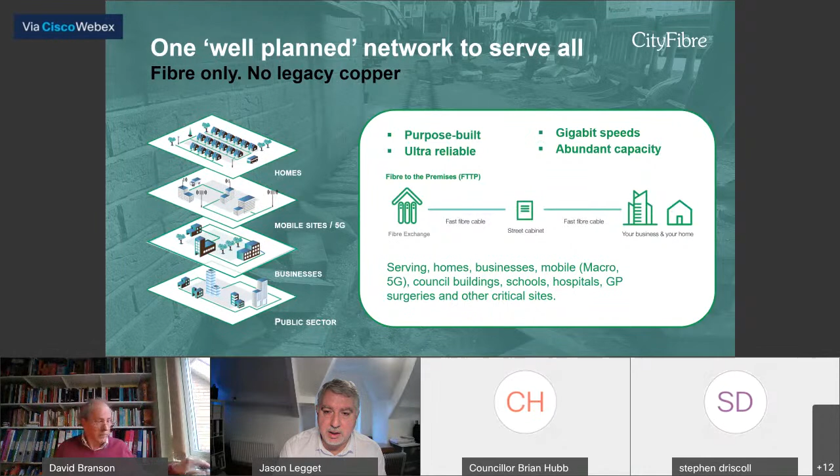For Middlesbrough, it totals around £40 million. We are making some design changes currently as we take a real close look at what we can physically do in Middlesbrough. Again, the point I made earlier is it's always going up - we are looking where we can to maximise our reach in every town and city.

So as we get into that understanding of what we can build, we're obviously trying to increase that investment. Currently I think we've gone from about 70 to 80,000 homes as a target, and we're looking to get higher towards 90,000 homes. That's expanding outside of the boundaries of Middlesbrough and into East Cleveland, into Grangetown, into South Bank and places like that. So this investment is a significant one for the town.

And what we've done is we've worked with an organisation called Regeneris to look at this long-term investment value to the town - what does it actually fundamentally mean? The data they provided back to us showed us ultimately, of course, we're going to make a direct investment with resources, with people, with creating jobs, etc., investing around £27 million in the cost of building that network. But also the longer term is what do you get back as a city or town having had that investment in the infrastructure?

They've looked at this from a whole range of different lenses, as you can see there, and they're presenting a really strong and positive message as to the value of this fibre. I think, as what we've been through over the last year and what we're still experiencing, we're all seeing the real value of connectivity now in our lives, and I think it's only going to continue to go in this direction.

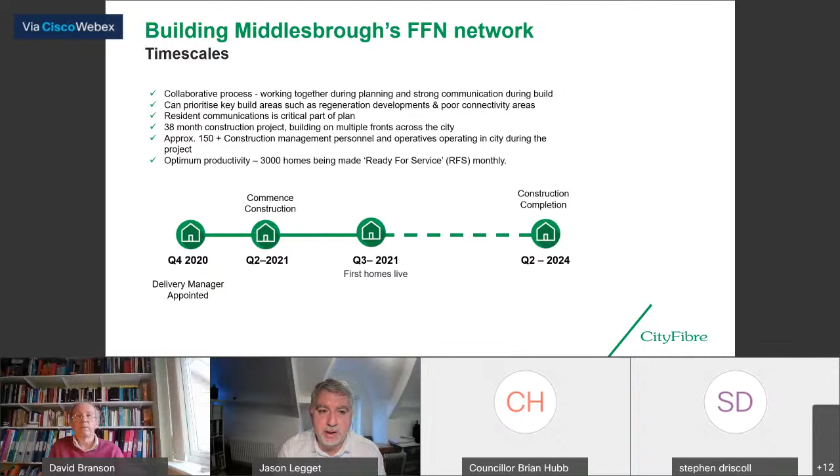Now, when we build in a city, we work in partnership. Our investment is a full private sector investment. We're not looking for public sector support by way of funding or any kind of contribution. We see this as an investment that stands up on its own, and therefore we're quite happy to work in parallel with local partners like the council.

The way that we like to do it is be as collaborative and open and transparent as we possibly can. So we look to set up governance structures that meet the needs of the local authority, but also our own build. We have a number of options.

We can look at monthly, weekly, and quarterly governance sessions. They can be about reporting against metrics, talking about the way we're working with local authority teams. We can feed back on a regular basis on how the relationship's working both ways, so we can address any challenges or problems.

We can support where we can to help. When we come into a town and start building a network from scratch, we accept that the amount of work we're doing can have implications for the town. So where there are issues, we can support the local authority, whether through additional support, people, or resources, or just looking to be cooperative in a partnership approach. We have a great deal of transparency in our work, so we're quite happy to share our progress, looking at maps, details, and where we're going.

As Jason said, my role is the area build manager with responsibility for all of the cities in the North East region, which would come under Jason or Steph's remit. I've been doing this for 33 years now, so hopefully by now we should be able to get this job done as quickly and as low impact as possible.

Just to talk you through the stages of planning a well-planned city build: first we do what's known as a high-level design. This effectively looks at the whole geography of the city or town, then subdivides it into areas called primary node locations, which are on average around 480 homes or premises, as they may include businesses. It can go slightly higher where we've got large tower blocks, MDUs, etc.

Once we've got the high level design, we issue it to our design partner, who will go out and physically walk every single street of the city, surveying it for suitability. They'll look to optimize the design - we're now very much leveraging what's known as PIA, or physical infrastructure access, utilising a lot of the existing Openreach network, be that underground duct or overhead pole, to allow us to run our cables without the need for major excavation works in a location.

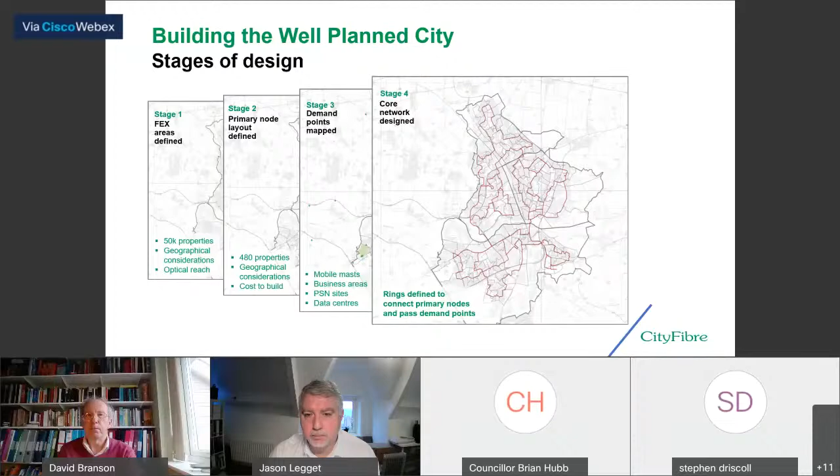Once we have the designs back for the primary node locations, we look at the sequencing of the build across the city. Rather than a scattergun approach, it's a case of evolution - we build out from where our fibre exchanges are located, in a contiguous manner, always connectable back to the fibre exchange and therefore lightable. So as soon as possible after people have seen us building past them and seeing the progress we're making, we're then able to offer services across our various ISPs to the local communities.

With regards to FTTP deployments, the provisional desktop planning is now complete. Low-level design is now underway, going well, and at quite an advanced stage, with 2 to 3 surveyors from our design partner currently in Middlesbrough, 5 days a week, working through those. We're now a 2 fibre exchange city - Sotherby Road, the Skippers Lane Industrial Estate, and Lytton Street, which is a small industrial estate closer to the town centre.

That's going to allow us to build the city more effectively, because we have a natural boundary line of the railway line that comes in from Nunthorpe all the way into the town centre. So by having a fibre exchange on either side, it dramatically reduces any special engineering difficulties and unnecessary cost when we can put 2 fibre exchanges, and that allows us to serve everybody in Middlesbrough.

We've now been able to extend that area out somewhat to gather up more homes. The connectivity is actually going to be comfortably in excess of 90,000 properties - about 92,500 at current numbers, based on the current premise count and boundaries. Although as we move forward with a lot of cities, we can increase our scope and extend our boundaries to gather up any new developments, any new blocks of apartments or flats that happen as a city evolves over the life cycle of the build.

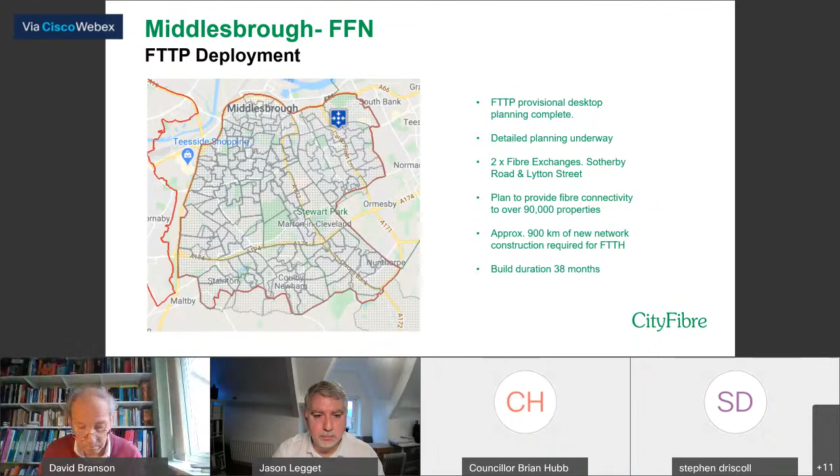There's going to be about 900 kilometres of fibre cable deployed into the city. What you're looking at now is a high-level design - if you're looking at the boundary lines, the various random non-uniform lines, they're actually boundaries of primary node areas, and within each one there would be, on average, about 480 premises or homes, depending on the type of locality we're in.

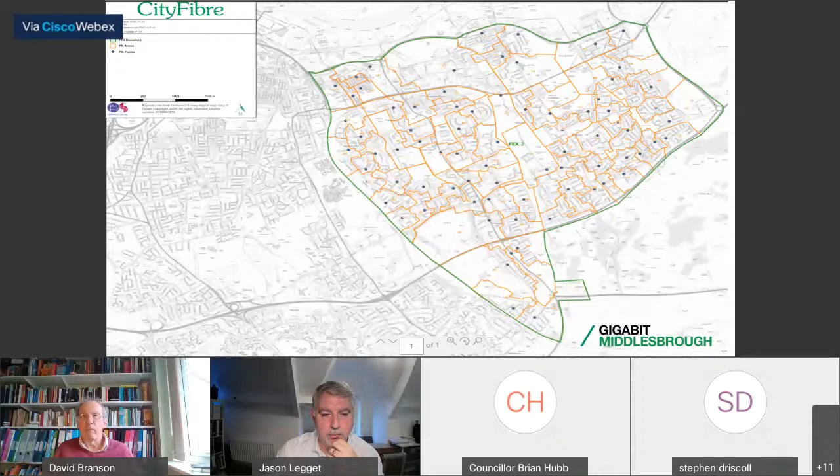If we'd had a single FEX design, it would have presented quite a significant number of engineering challenges, simply to navigate not only the railway, but there's also a beck that runs alongside it at certain locations. So early on in the process, I reviewed the city and went back to our business with a proposal to move to the 2FEX model, which gives a better level of service and coverage for the residents of Middlesbrough, but also presents a far more acceptable level of engineering challenge.

This is a very, very simplified drawing, but what it shows is that once we leave our fibre exchange and get to a primary node, that's always underground feeding the primary nodes, because that's what's known as our core network. They are much larger fibre cables. Once we get to the primary node, then there are a number of options that we have.

We can feed our FTTP using DPA, which is duct pole access, or PIA, which is physical infrastructure access - they're absolutely the same thing. DPA simply lends itself more to where we're using Openreach's existing network all the way up to the house on underground fed estates, so we can get to the front wall of the premises ready for install. On the one where we go overhead, which is PIA, that's a simple overhead install in exactly the same way anybody would normally get a telephone line installed. We get out to the poles, then we can span along, and get to the customer premises overhead.

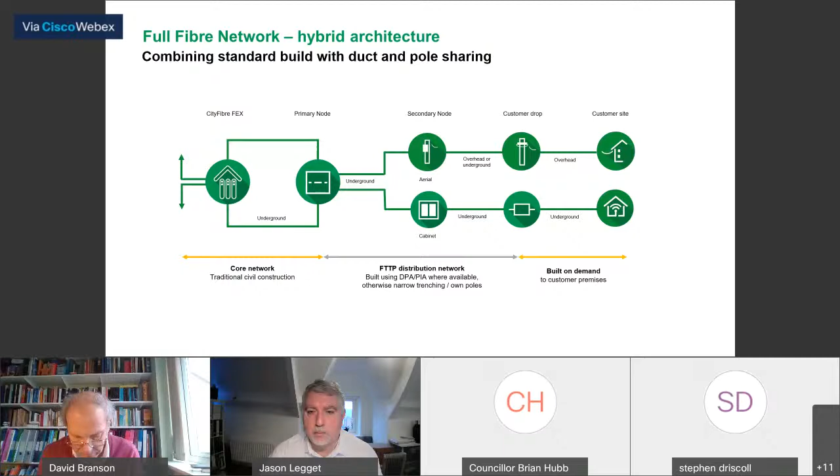We get from a primary node to what's known as a secondary node, which is a smaller cabinet that takes 48 premises as a maximum. From there, we have individual 7mm buried tubes going to the curtilage of the front of the premises. Once people request an installation, we can blow a very small fibre through it and provide connectivity within about an hour or two of arriving on site. An installation will be completed by an engineer.

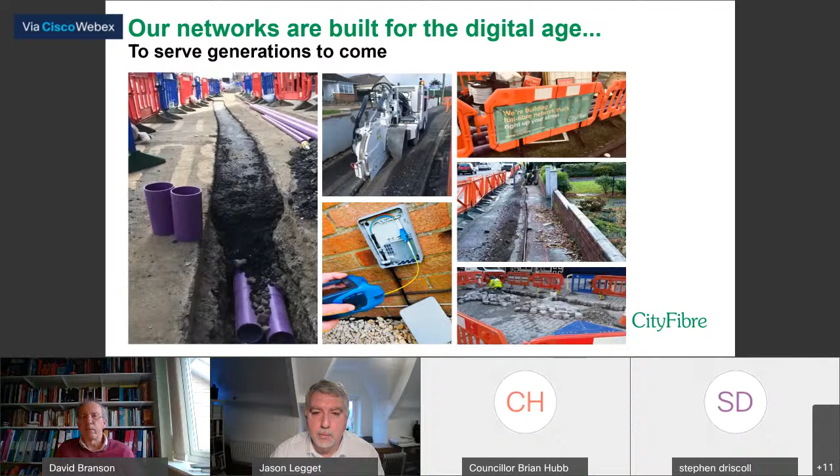The construction process is quite straightforward and not overly complex in terms of the civils aspect. Site setups will be in accordance and compliance with the Red Book and the Code of Practice. We regularly have both our own build assurance engineers employed by City Fibre and supervisors going around performing regular, frequent and robust checks to ensure compliance.

The laying of the ducts is done either through narrow trench or a more standard 300mm trench, using the open cut method—so we are actually opening ground rather than using thrust boring or other techniques. That said, there are occasions where directional drilling might be necessary due to challenges above ground, like very busy roads or newly reinstated ones. In certain circumstances we can utilise directional drilling.

Reinstatement of the pavements is always in accordance with HAUC and the SROH, so standards are checked, subject to robust, frequent and widespread auditing across the whole area. We task our contractor with auditing a minimum of 50% of their gangs deployed on a weekly basis. Although our target for our build assurance engineers is slightly lower, we generally exceed it by some way, to ensure we get a representative, value-add sample giving a clear picture of the standard of work, and ensuring we leave pavements, roads and grass verges in the condition we found them—one key factor in minimising impact on residents.

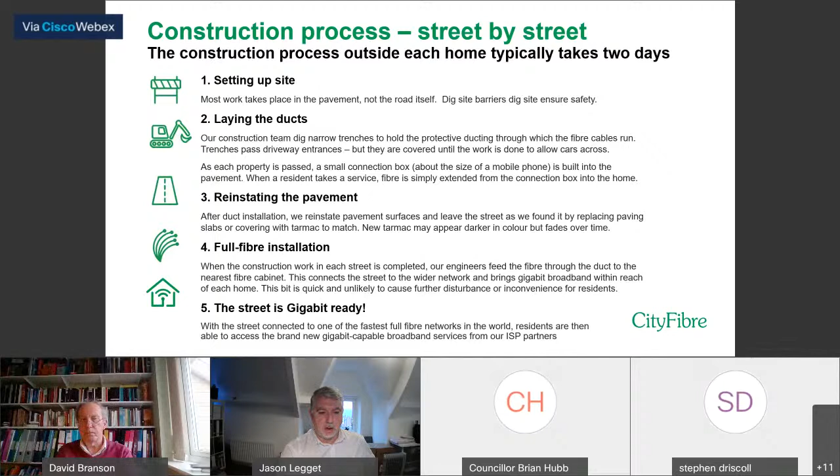Very good, Steve. I think we've covered off a lot of the construction processes. I'm sure councillors will have questions if you can stay on the line for a few minutes. Yes, no problem at all.

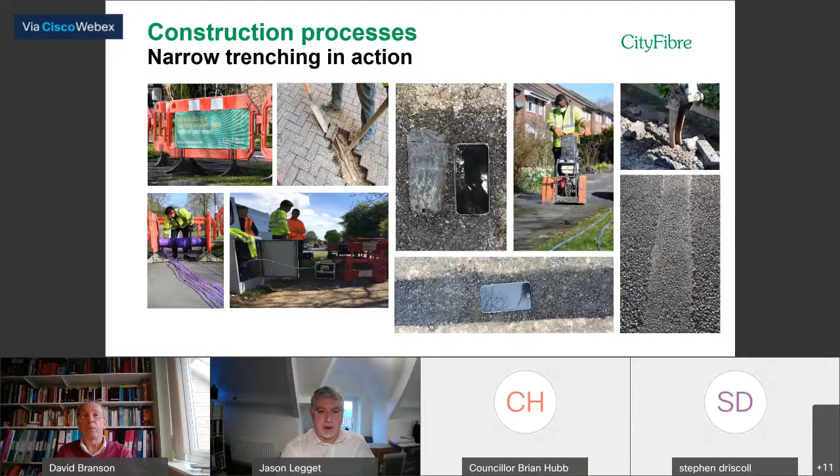We're going to move on to community engagement, and talk briefly about our marketing approach and working with stakeholders across the city. So I'll hand over to Selina.

As Jason mentioned in the beginning, I'm the regional market engagement lead, and this is the type of stuff we do. It's really essential that we keep all the residents up to date with what's happening in their area, and also keep all of you guys up to date as well. At the moment we're in the pre-build stage, so we have the stakeholder engagement. We also, at the end of last year, did our press release announcing that we were building in the town, which ran really well—we got quite a lot of coverage and quite a lot of positive outcomes from that.

As we move into the construction stage, that's when we do all the resident comms and site branding. Throughout the builds, we'll keep all the residents up to date with where we're building, and we'll also do more sponsorship events, hopefully post-COVID, when we're allowed to get out and engage with the public.

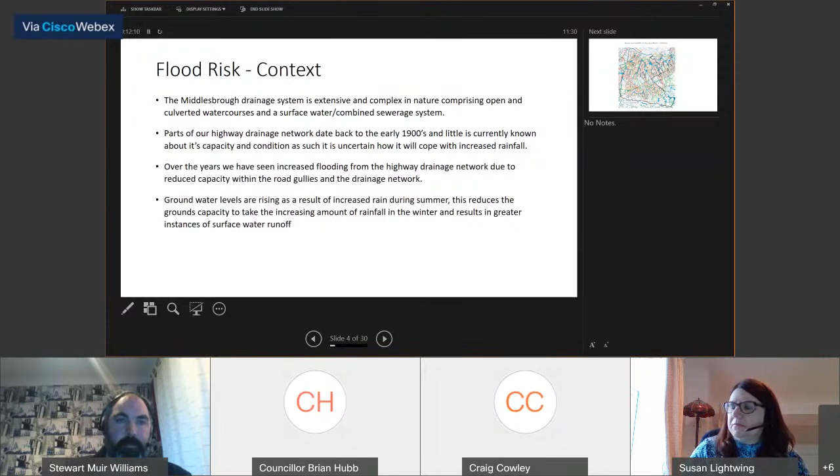So a 1 in 100 year event doesn't mean it will happen every 100 years. We might see it happening today, tomorrow, two days next week, and then never again for 1,000 years. It's the percentage chance, and we're not able to predict that. But what we need to do is try and do everything we can to be resilient if that rain comes.

Flooding can come from a variety of sources, as I've indicated before: surface water runoff, ordinary watercourses, and surcharging sewers. Surface water flooding occurs when intense rainfall, often of short duration, is unable to permeate the ground and enter drainage systems quickly enough, resulting in ponding and overland flows.

An example of this would be on Beechwood, where there's a culvert that conveys all the water away from the actual Beechwood estate. All the fields to the south of Beechwood are inundated with water. The water flows across the fields into the estate, and goes directly into the drains if it can.

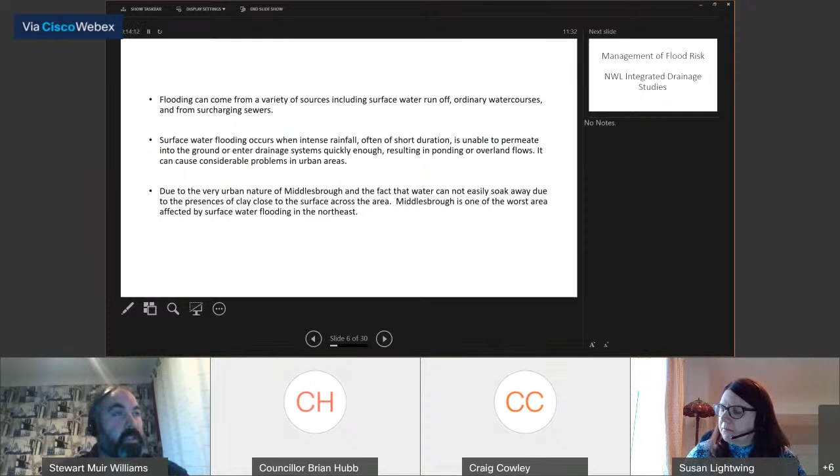If not, it goes into the actual culvert. The culvert is then under capacity, it can't cope. The drains then can't get the water into the culvert, so the drains flood and the estate floods. That's a prime example of the issues we're having across Middlesbrough.

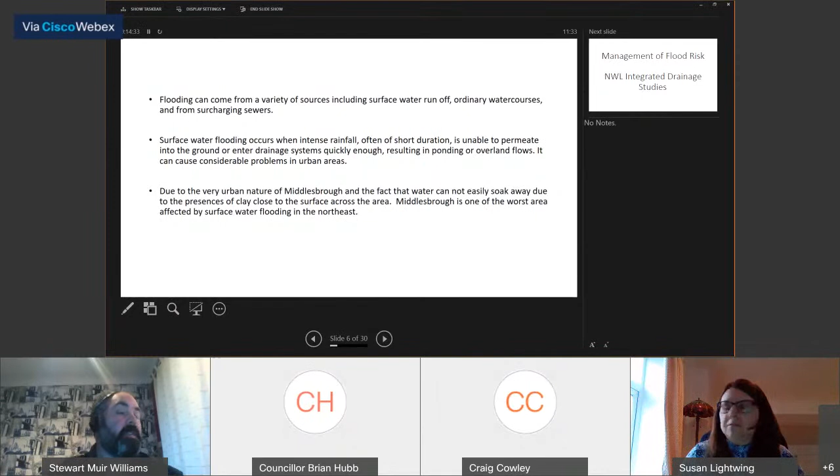Moving on to some of the work we're carrying out, we work very closely with Northumbrian Water, and one of the things we cover are integrated drainage studies. Middlesbrough has about 4 or 5 drainage areas covering the whole of Middlesbrough. These are catchment areas where water falls and drains into specific drains.

As part of the work we do with NWL, we undertake a stage 1 and a stage 2 study. A stage 1 study is where we look at any history of flooding, looking at paper documents to see if there's anything that indicates risk areas. We also look at any modelling that's out there to see where the risks are. Out of that, there are normally about 10 or 11 risk areas, and we take the highest risk ones, around 3 or 4, forward to a stage 2 study.

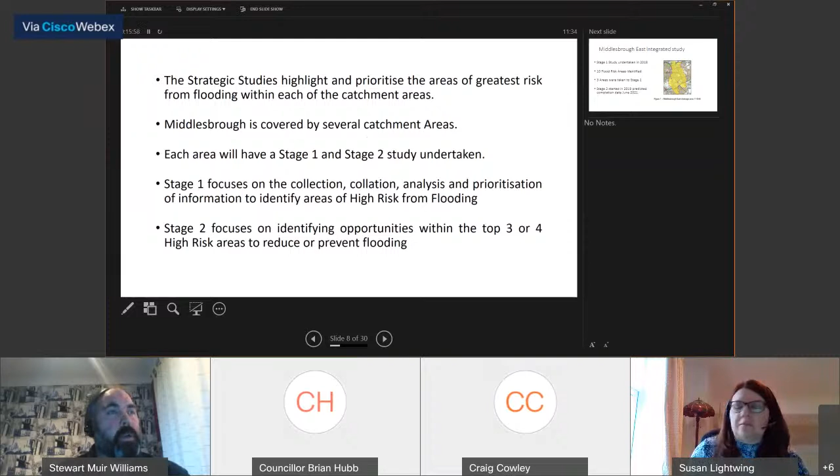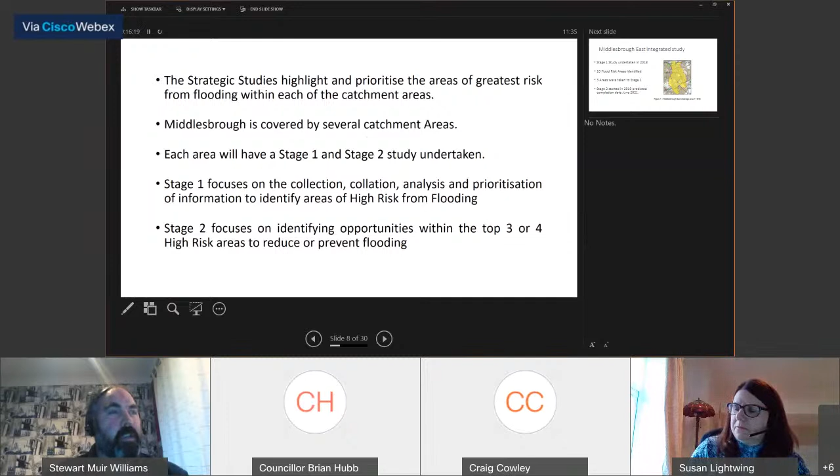At stage 2, we carry out a lot more in-depth investigations and modelling. From that, we get from the company what the problem is, how we could resolve it, what the economic issues are, and what the cost would be to resolve that solution. Basically, it's everything we need to apply for funding to the Environment Agency.

Currently, Middlesbrough has one study on the go, in Middlesbrough East. The stage 1 study started in 2018 and is now complete, identifying 10 flood risk areas. 3 of those areas were taken to stage 2, which started in 2019 and is anticipated to finish in June 2021. That should give us all the information we need to apply to the Environment Agency for funding to resolve those flood risk areas.

So, future planning. Funding is achieved in various ways, either through the Environment Agency and money they get from central government, or through local levy, which is a percentage placed on council tax. That goes into a pot that we can apply to, either for money to do studies or money to do actual physical works on the ground. It's a fund for the Tees Valley and the wider Northeast.

The Environment Agency's 6-year funding programme from central government has just come to an end, called the medium-term plan. Under that, we had a number of schemes implemented, including Saltersgill and its flood scheme. Other schemes we got or are applying for money for include Ormesby Hall area and Cornwall Close, which I'll come on to later.

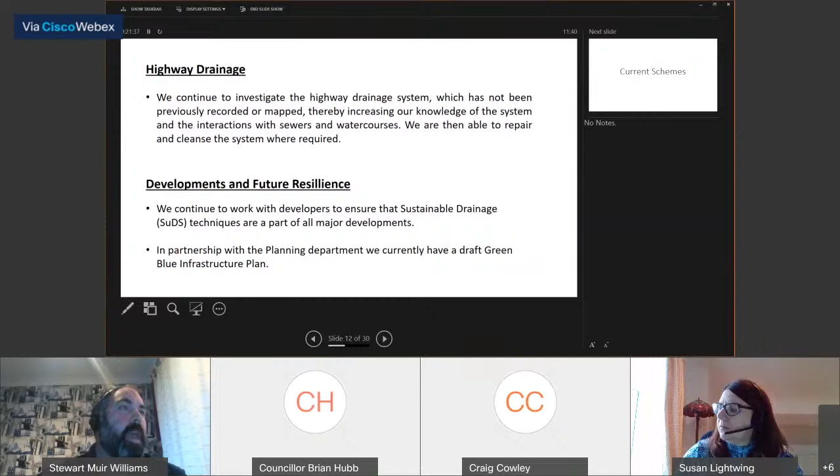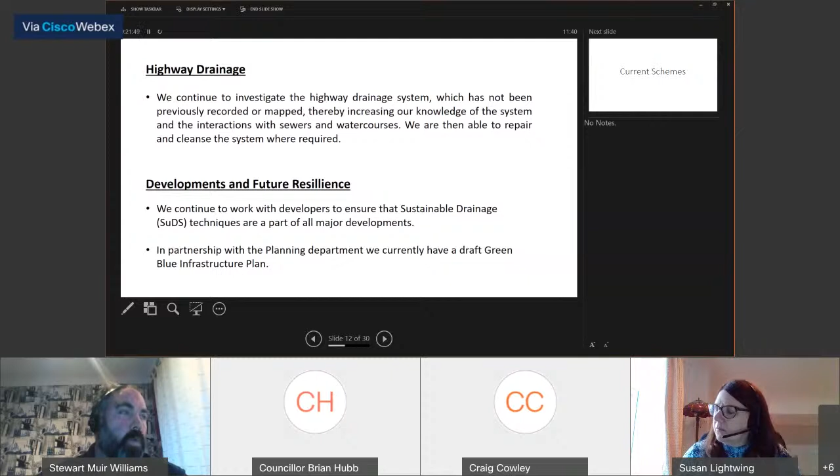This is basically looking at the whole of Middlesbrough, looking at what green spaces we've got and what benefits could be brought in those areas. More importantly, we share the same interest: we need green spaces to be able to hold water and undertake schemes to hold water back, so we're looking at where we could utilize these areas. This can be anything from schools using rain gardens or having ponds on their grounds to hold water back, to simple walkways and public rights of way where scrapes can hold water before it goes into the actual becks.

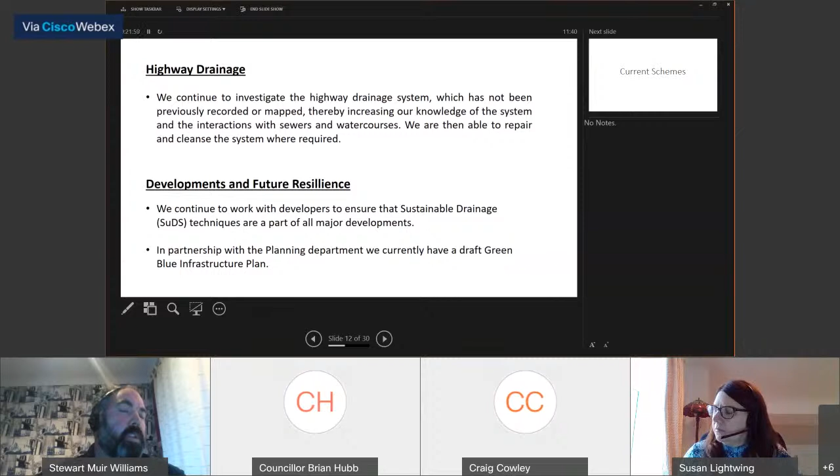Current schemes - I mentioned Saltersgill Fields before, and I've gone at length about the whole scheme, so I'll give a brief overview. The scheme involved creating a series of ponds or scrapes between Saltersgill Road and the allotments, and a bund - a mound of earth around the fields between the allotments and Marton Road. It was envisaged this would protect 306 properties, and the scheme was proposed to be completed in 2019. We've had unprecedented rainfall over the last couple of years, which delayed the scheme, but I'm glad to say we've finished construction and came in on budget with additional benefits, which was pretty good going considering the rainfall, delays and COVID.

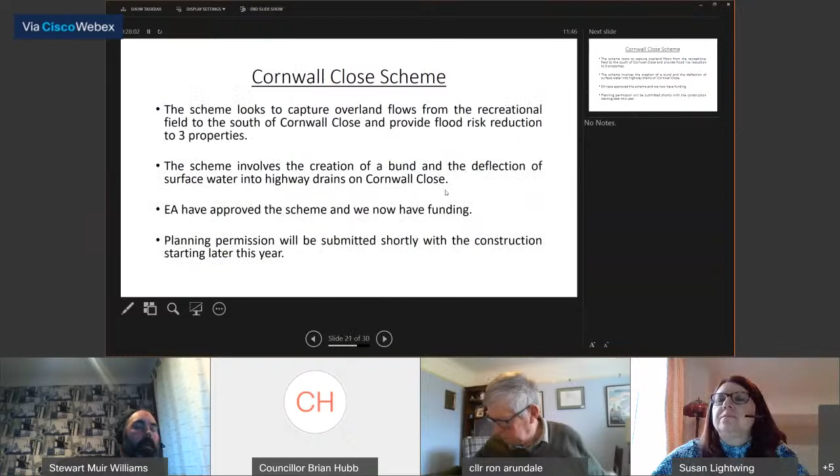We'll go on to Cornwall Close now, which is another scheme that was part of the medium-term plan. We have managed to get the funding for this, looking at a very small number of properties, maybe 2 or 3, and a very specific field, quite a slope, where water falling on this field was running off and directly into the back of the properties. We've managed to get the funding, planning permission will be submitted shortly, and construction should start later this year.

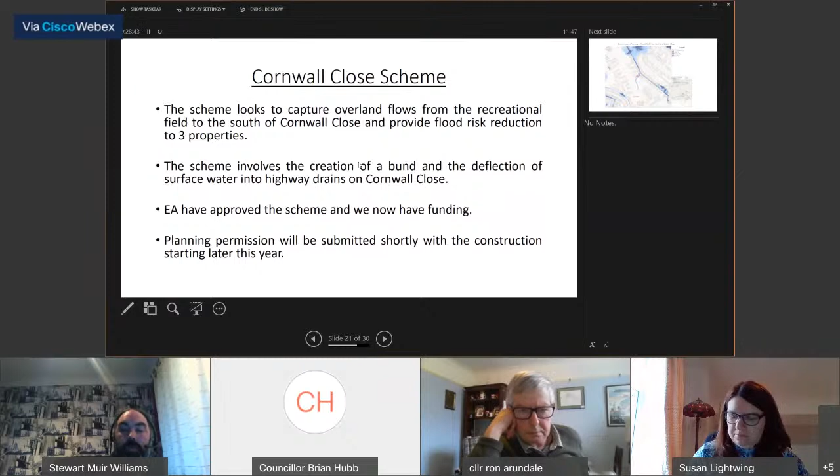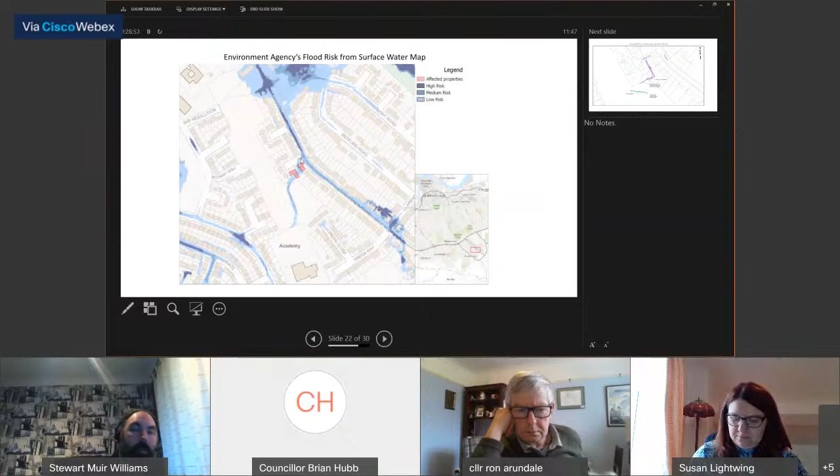It's a very small scheme, but that's the flow path as per the EA's surface water mapping. You can just see the couple of properties that it actually floods, and it was flooded a couple of years ago.

What we are doing there is a very small bund across what is a small valley. We've got a pipe coming out of the bund. There's no throttle going to be put on, no plate, no restriction. It's purely the amount of water and the size of the pipe that will throttle it down, allowing the water to be held back and slowly released.

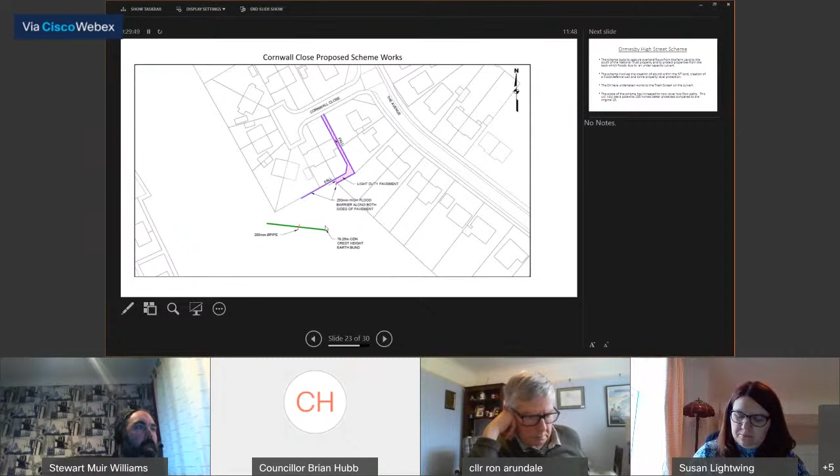The other one that is quite a high impact scheme is Ormesby High Street. There's the National Trust Ormesby Hall, and what we've got there is a large amount of farmland where the water flows across when saturated, through the woodlands, and comes out onto the road. It then flows down the road, and at the low point it's collecting, and as it rises it's flowing into the beck, which I have a map to show you in a second.

So there are 2 issues here: one is the overland flow, and the other is the actual beck itself and the culvert that runs under the road. There's a trash screen on there, and the EA have recently increased the size of the trash screen so that hopefully the water will flow through and get away quicker, which should enable the highway drains to cope with the water coming through.

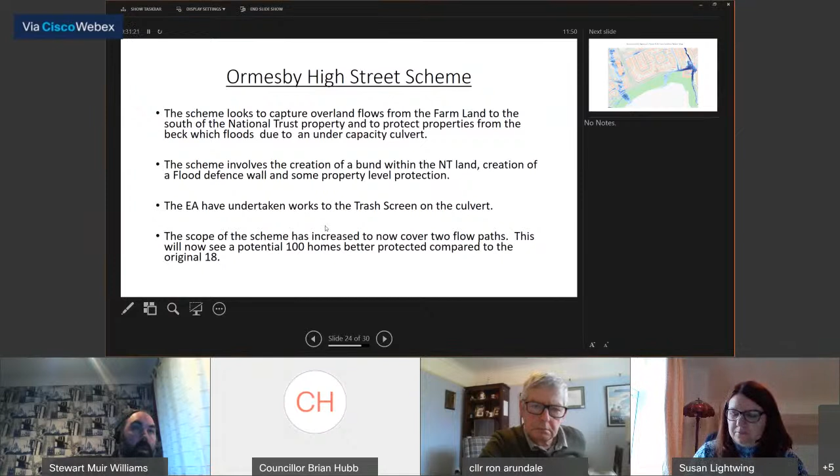But there is still a need to look at the overland flow. As you can see from the bottom point, originally it was covering 18 properties. However, following the lessons we've learned from Salters Gill, there was a second flow that was identified, and now that is potentially looking at protecting 100 homes. So a lot more properties, and we always try to maximise the number of properties we can protect. It not only gets us more funding, but we have a target for the northeast that the government sets, and we need to help contribute to that target and also better protect the residents of Middlesbrough.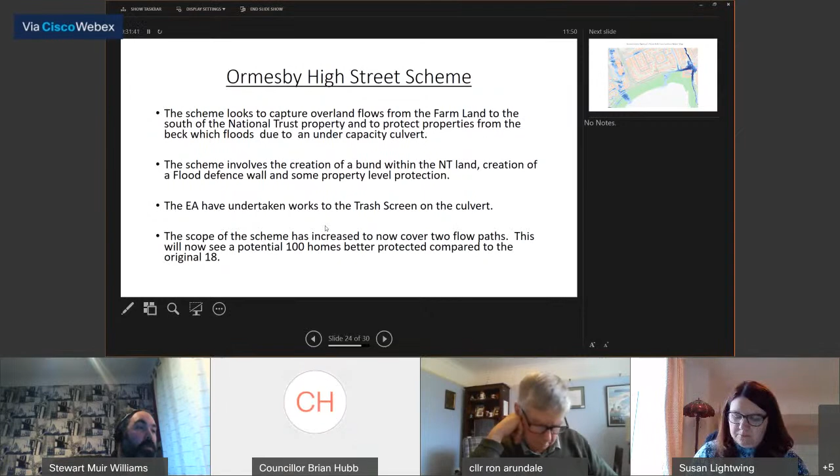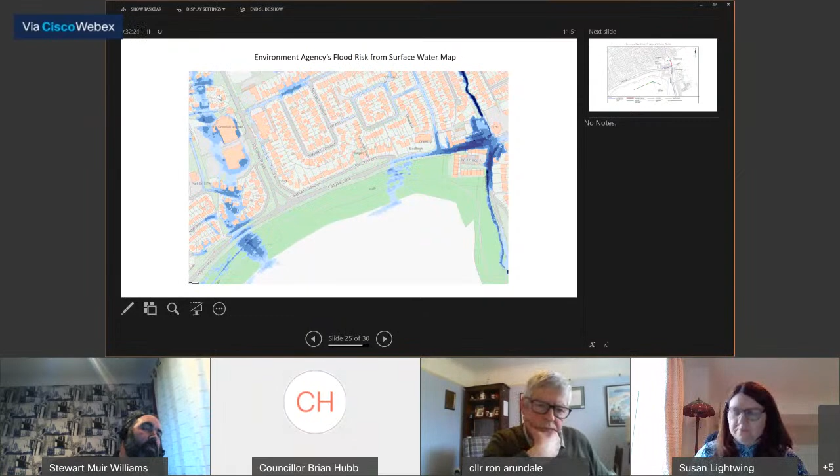So this is showing the two flows. The first one that we identified was this one here, that comes out onto Ladgate Lane and then causes flooding further down near these properties, and there is a culvert under here. Also, the beck that flows down here is showing that the water in certain periods cannot get through the culvert quick enough, so it backs up and floods this area. The other flow that we identified was over near Ormesby Road, and this flows through the back of the properties and down towards the town. So that is where the additional properties are coming from.

So this one again, a very simple idea, is to have some form of earth bund towards the fields of Ormesby Hall, either into the fields or perhaps on the edge of the woods, but this is down to negotiations with the National Trust. This will hold the water back, and then the water will be gradually released again so that it flows across and either into the beck or out into the natural drainage ditch that runs through the woodland, which then drains into the culvert and away down Ormesby Beck, down Middle Beck.

The other additional benefit that we're going to do is replace the wall that runs in front of these properties with a flood protection wall, and it will have floodgates.

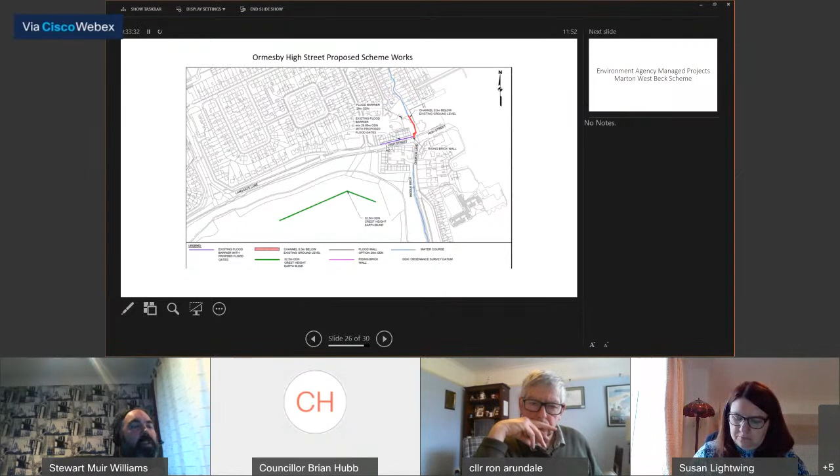One of the problems that happens is the water runs down the high street and then down the side of the club here. So we are looking to facilitate that natural route by raising the walkway there, so the water can, in extreme events, flow under the walkway and back into the beck.

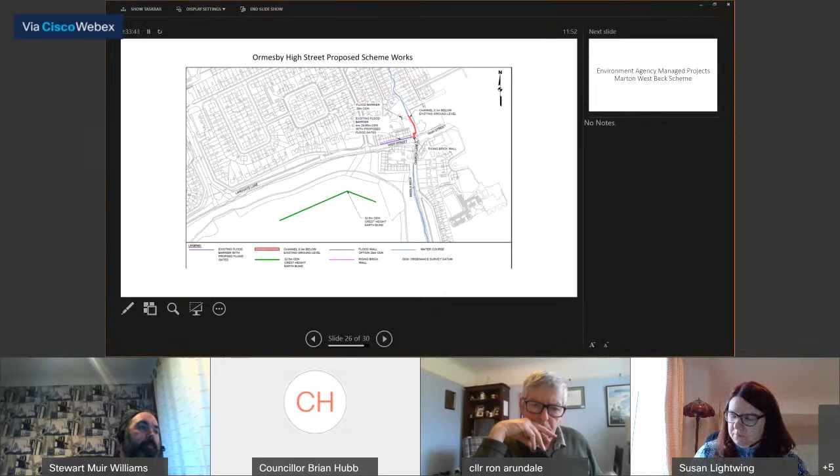So that's Ormesby. The other major scheme happening over the last 6-7 months is one that the Environment Agency are leading on Marton West Beck. The reason there is a split is because the Environment Agency manage main rivers, which are Marton West Beck, Middle Beck and Ormesby Beck. The council manages minor watercourses, such as Bluebell Beck and others, and also any drainage ditches or culverted watercourses, of which there are many within Middlesbrough. That's why there's a split.

So the Environment Agency have been working quite hard on trying to resolve flooding issues on Marton West Beck. In particular, they're trying to reduce the amount of water coming downstream, so that the lower stream culverts that go from Albert Park through to the A66 and out to the River Tees can cope. I think you'll be aware that in past years there have been flooding issues in that area.

There are several things they have been doing, one of which is they identified a flow of water coming across Albert Park. So, and I appreciate it's difficult to see from this plan, they have created a series of bunds in this area, just here, which holds the water and then gradually releases it into the drainage network, which flows down into the culvert.

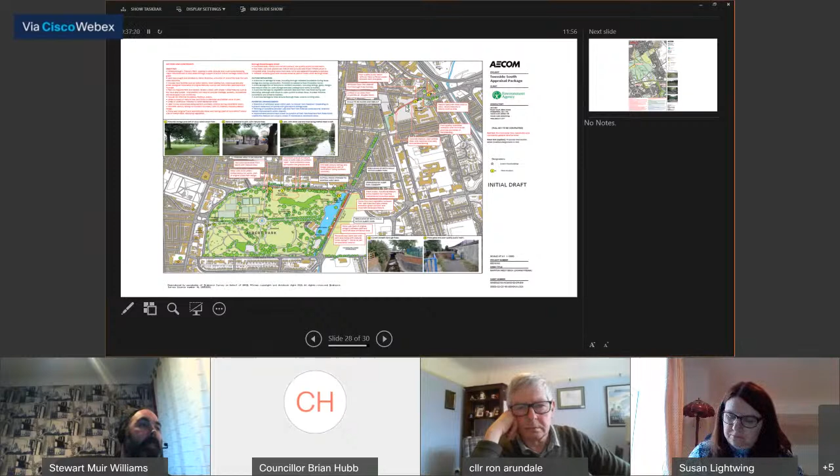The other aspect they have done is upstream, near Nature's World. What they've done here, and I hope you can see this, is just in this corner here. I hope I can zoom in. There you are - they have created a series of bunds.

Again, the bunds gradually hold the water back and then release it gradually into the beck, so the water is held upstream rather than being allowed to come downstream, in case there are any blockages further down at any of the bridges or grills causing flooding.

The two bunds they have created - I do appreciate the slide shows three here; this is a slightly earlier plan. There is one bund constructed to the northeast of the Acklam Cemetery, and one built on the actual municipal golf course land. Both are doing the same job, holding water back from the watercourses that flow across and into the main beck.

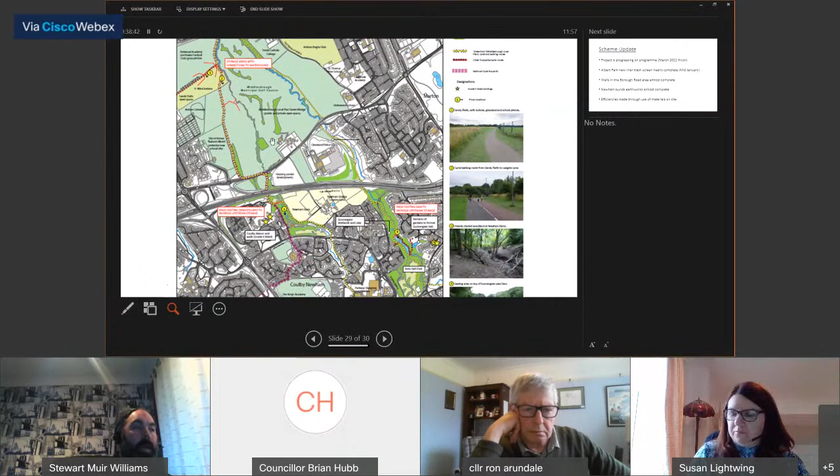So that is all of the scheme that the EA are doing and that Middlesbrough Council are currently doing. I'm happy to take any questions.

Just going to check I've not got another slide. Oh, right, there you are. Right, so...

Thank you very much.